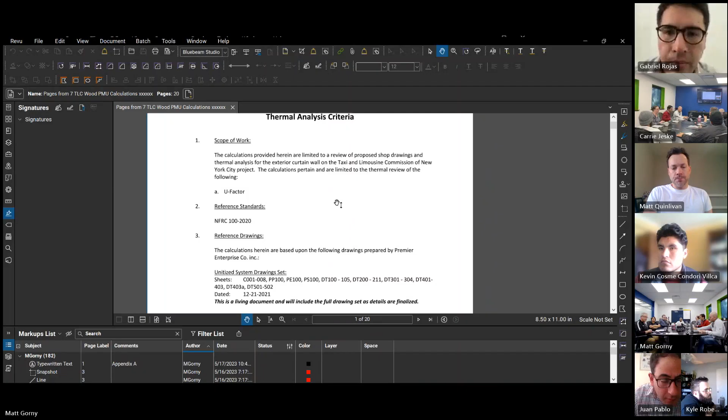We kind of jumped into reviewing thermal analysis projects. I only took a few classes of this in school, right? So everything I've really learned on this has been from getting reviewed and reviewing the codes and stuff like that. So heat is energy and it's trying to pass from a higher state to a lower state, right?

So what we're measuring in facade systems is, as we're turning on our mechanical systems, that heat is trying to get outside. And we want to measure how fast it gets outside. And we want it to get out as slow as possible. It's kind of the real zoomed out view of what's going on with thermal analysis.

One of the big things that's going on right now on the East Coast, it's being driven by code, and it's the energy code that's coming up, should be active 2024, 2025, where they're doing a heck of a lot more for following the paths. They call it bridging. So it's going to have detailed analysis of bridging that occurs in between facades and the regular structure.

So I think that's an important part of it. We're in a good spot if we can do some of this and add that on to part of our services. But that's where it's going. That's where the industry is going. Go ahead.

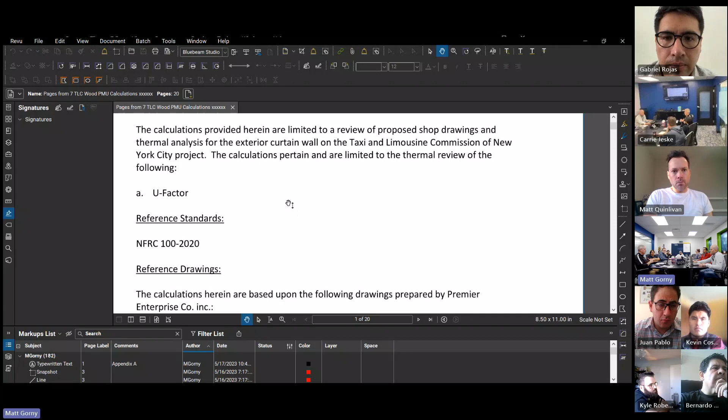So kind of with the big zoomed out, to just elaborate on what Stuart's saying there with bridging, that's kind of what we're looking for in our wall systems, because energy doesn't have a thought process, right? It just follows the path of least resistance. So if you got a wall, you got insulation here, and you got metal here, it's going to funnel to the metal. Or like on your house, it's funneling to the studs as much as possible.

And that's how it's kind of trying to get out. And so that's what we're finding. We're trying to find what is the bridge in the system. Can we fix it? Or just in general, U-factor is how fast does your heat transfer through your system? You want it to happen as slowly as possible.

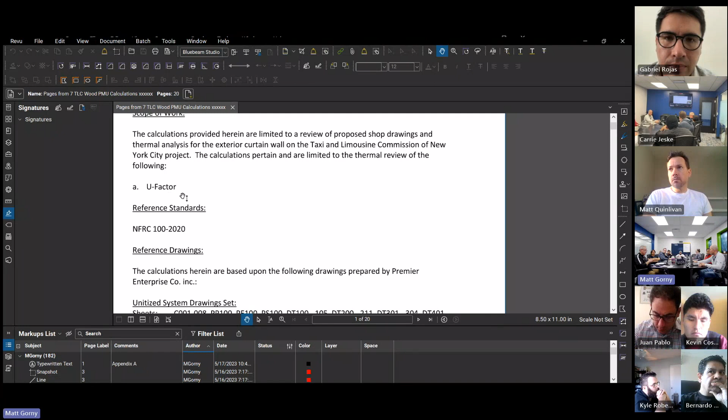So code on this is NFRC 100. There's so much I've gotten into with the consultants on that. It's a code and standard that we want to stick to, but it shouldn't be thought of as like the IBC. It's more like a reference standard. There's some stuff in there we definitely want to stick to because NFRC 100 is the governing body for like Kawneer, Tubelite, all those guys and their systems. They're going to follow NFRC 100 to a T to get their systems passed.

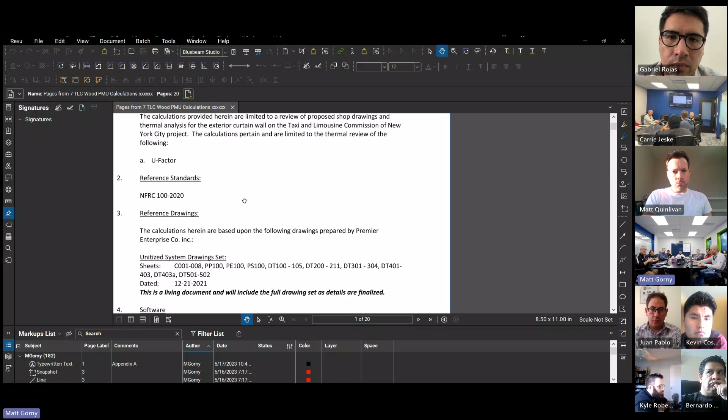And basically, there's 3 stages that they have to go through. They have to get it simulated, which is what we can do. They have to get it tested, and then they have to have a third-party person put those together and make sure they line up. And so that's kind of what the big companies do. All we can do is simulate, which is calculation.

Why would they have us do that rather than just go to a big company? I think they would like to come for the structural and thermal part. Just like a one-stop shop situation, I think. So they know they're still going to have to go test and have somebody put it together, but preliminarily we'll do the structure and the thermal.

Yeah, I mean, a lot of these are tested, right? Ultimately, whenever we've got the stick-built systems that all the manufacturers have, they've already gone through some testing. And also they've done the thermal calculations. They already have packages of those to be able to submit. Where we really get involved in it is if they have unique applications or if it's a custom type of system and nobody has done any types of calculations with it.

And so in the past, that's kind of where Gorny has actually gotten involved in it. He's been able to do some of the thermal modeling on these custom systems, and show the architect as it's passed up the chain as a submittal. Usually it's in the specification requirements that a thermal analysis needs to be done and submitted.

In a lot of cases, the thermal analysis specs that they usually call out make reference to having to model it associated with the perimeter boundaries a lot of times. Sometimes that's in there, sometimes it's not.

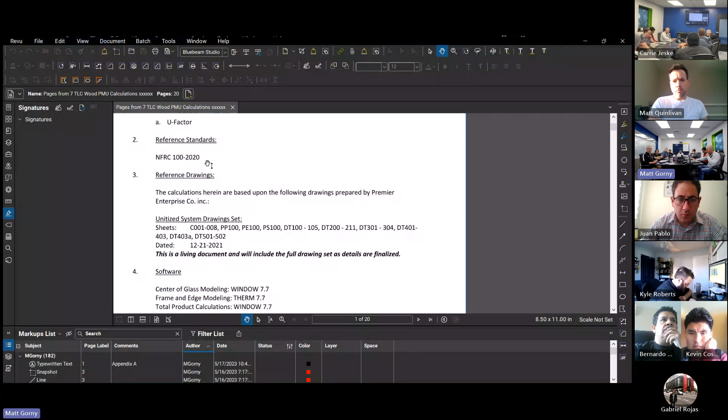But yeah, so back to what I was getting into, there's the 3 stages. There's simulation, testing, and then there's a third-party consultant that lines those together. Simulation is the only thing we can do. That's the calculation. To answer your question, Carrie, the only reason they would come to us over going to like an ATC or somebody who does that is on custom systems usually.

Yeah, just because it's very expensive to get it tested. So if you got a custom system that you're using on one job, you don't want to spend all the money to get it tested and go through the whole deal. You could just get it simulated by us and see if the architect will approve it. Custom system unitized is the sweet spot. Custom systems usually are unitized. At least when I've seen the custom systems, they're always unitized systems.

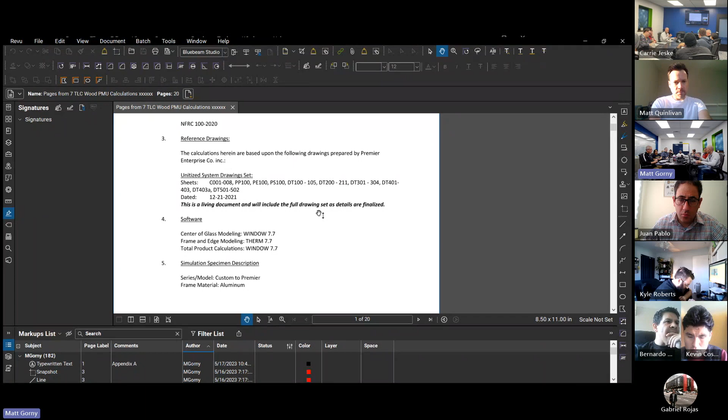Okay. They're for like the bigger buildings. At least from my experience, a taxi building is a custom system. 65 Franklin was like a custom system. So it's just stuff that's not like Kawneer, YKK, Tubelite that they're trying to sell repetitively for a bunch of different things.

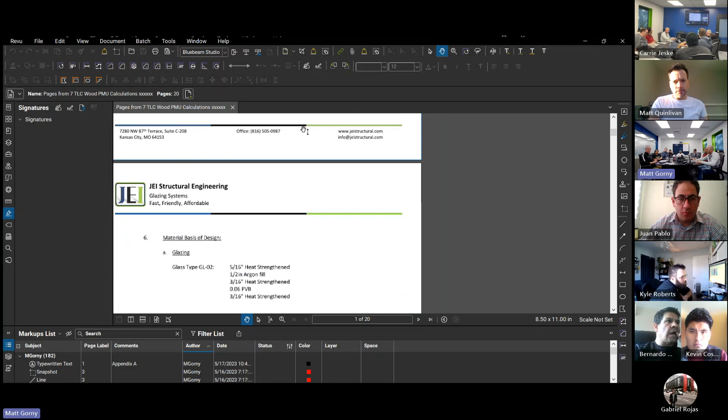Okay, so basically our software that we have is Window. It's called literally Window, and then Therm. And so Therm is going to model our parts and pieces. I'll kind of show you how I did that. And then Window is a program that combines everything together into one bay or unit. That's the glass on this one.

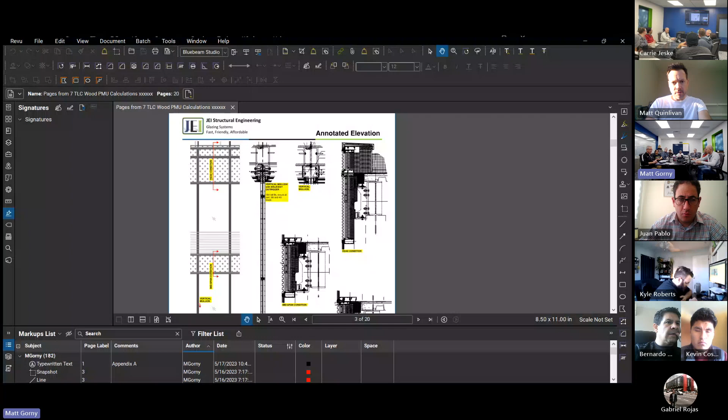So essentially, I'll keep it short. I wrote a whole document on how to use these programs in detail and a lot of the stuff we're talking about in the shared area. So I won't go into super detail because we have that available. I'll just try to do the truncated version of what we're doing. So basically, this project is a unitized project. It's repetitive, 2-story around the entire building. This is one unitized unit and this is one unitized unit.

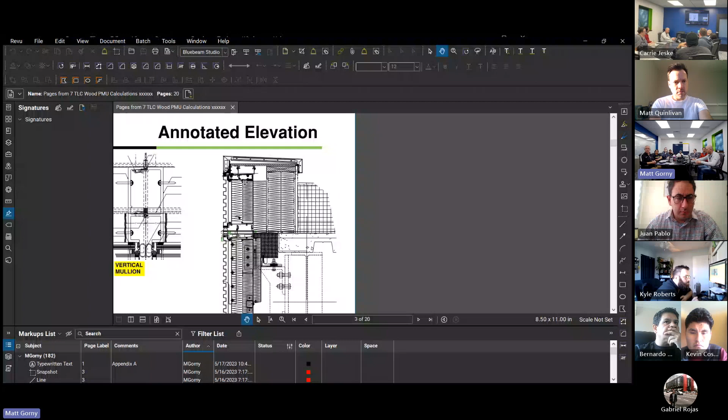They come together and basically with a thermal analysis, we're trying to find how fast the heat flows through the system. So we have to find the thermal properties for each unique part and piece. So the unique parts and pieces to this one, I heard Stuart describing, we have the top of the curtain wall with the parapet system. This is kind of a weird area where technically our curtain wall is here, but it interacts with the parapet.

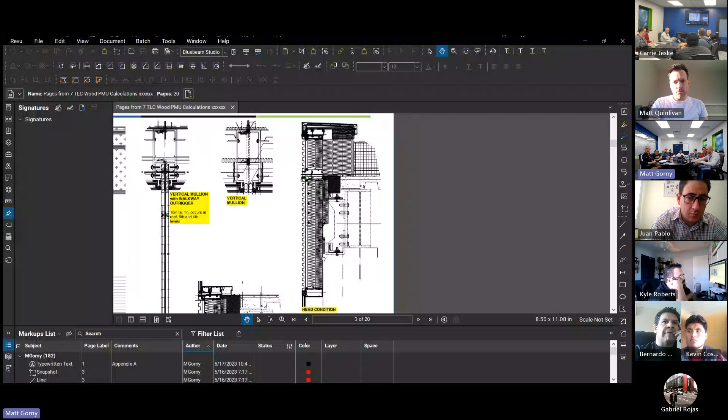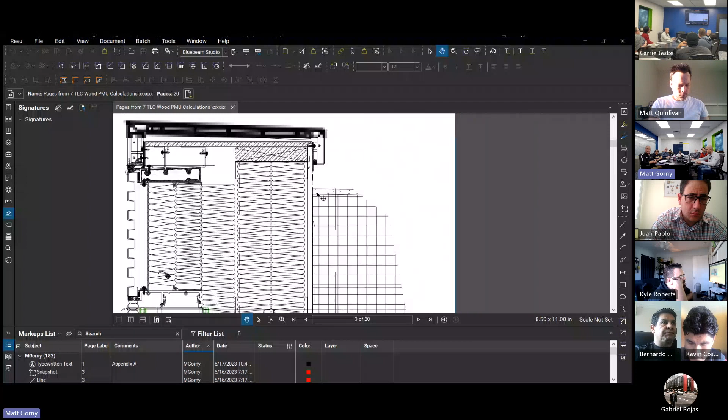How are they enclosing the back end of the parapet? So that's just light gauge framing. I don't know, this must just be EIFS or something. I'm not 100% sure exactly what this material is. What's that right behind that horizontal? That's roof insulation. No. Fire stop. Yes. So do you include stuff that's part of the parapet as part

of the U value? Yeah, for just this. Usually in normal situations, I lean towards not including surrounding materials because we've had consultants tell us not to do it. But in this case, the consultant and design team asked us to review it. So basically it's cold-formed metal studs, insulated. And I'm pretty sure I just used EIFS for that piece.

This is part of what I was talking about before. A lot of this is up to the architect—sometimes they spell it out in the specs that they want the surrounds modeled along with it, but a lot of times they don't.

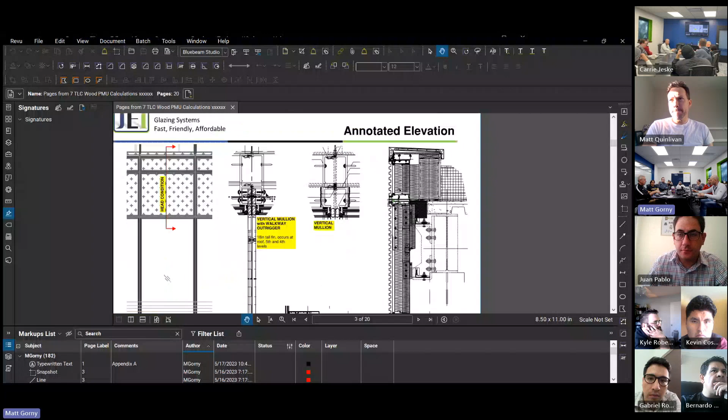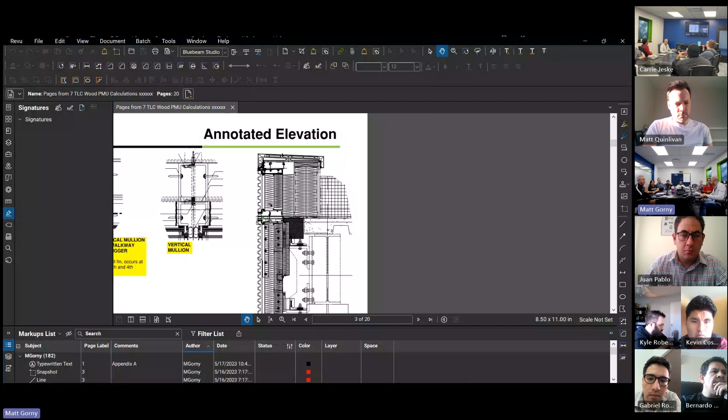It's tricky because where do you stop in some cases? I've had others where we've gotten into battles with them where they say use surrounding structure, but there's no clean line like this where you say, alright, you've got the parapet cap and roof insulation, and all this is probably good. But what's happening up here, that's a clean line, versus maybe a jamb condition where you've got wall everywhere. Where do you stop? Do you just model the whole building? No, someone needs to take over from there, a different contractor. So it gets tricky with that.

That's the head condition. This one, we have a weird midspan condition where we have a walkway—I'll get into why that's important being attached to the curtain wall. But basically you've got vision glass and then spandrel glass, so 3 different spandrel glass conditions and some vision glass conditions. And then you've got the vertical mullion condition. Typically on a typical project it would just be one vertical mullion on these unitized type projects, but on this one I also had to model where the fin was because I wanted to see what happened there.

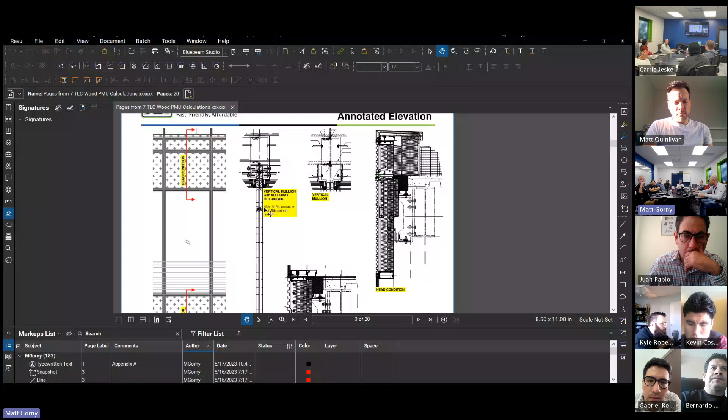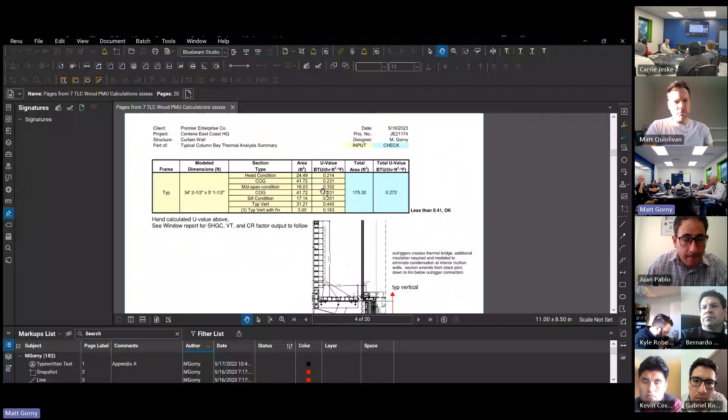So kind of getting into that. I'll go into the models here, but usually I get right to the results up front so you can find that quickly. Basically, long story short, we find the U factor for all these parts and pieces with therm, and I'll show you that. Then we do an area weighted average of how much those parts and pieces are a sum of the whole.

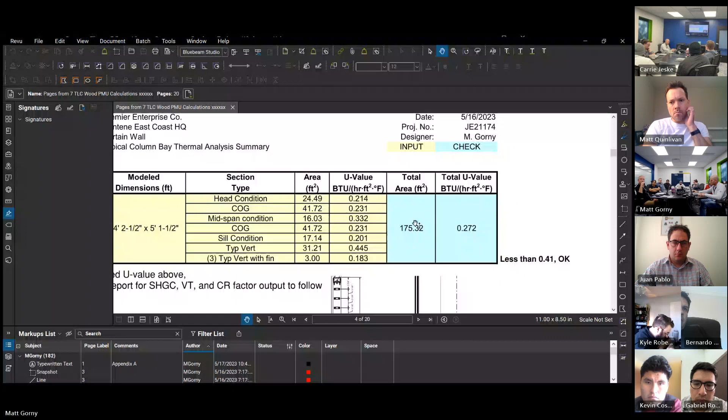So center glass, all these different unique conditions, I find the U value, I'll show you. Then you plug it into this sheet, find the areas of each. These are the U values, the sum of the total area, and that gives you your area weighted U value of the assembly. It's like looking at something simpler, like taking your wall at home—you've got studs, you've got insulation. Has anybody taken heat transfer thermal in school? Yeah, so it's like a parallel path, and you take the inverse sum, and that's how you find the overall U value of your wall. That's essentially what we're doing in a bit more of a complicated assembly.

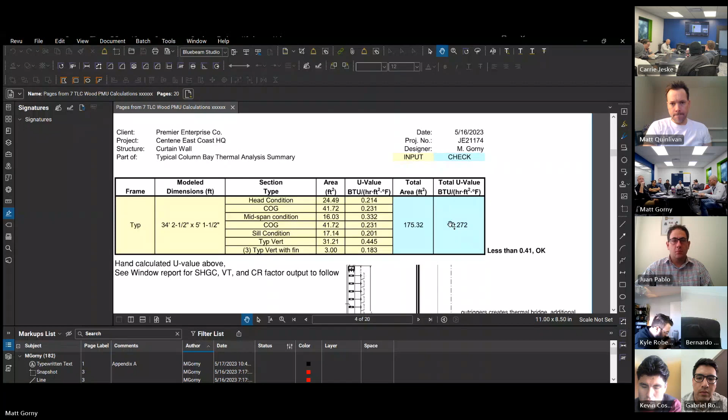So this is therm output. You recognize that's my head condition with all the insulation. This consultant was a stickler about making sure we reported all our information, so I think it looks better that way—I started doing this. This is all the materials we used and their thermal conductivity, how fast each material allows heat to transfer through it. The program does the math of figuring out the assembly's factor, and this is the heat map it produces. So that's your overall U factor spit out essentially here.

This is out of therm? It's out of therm, yep.

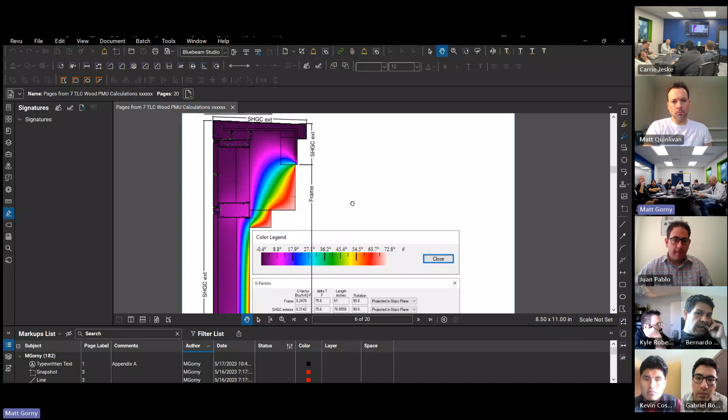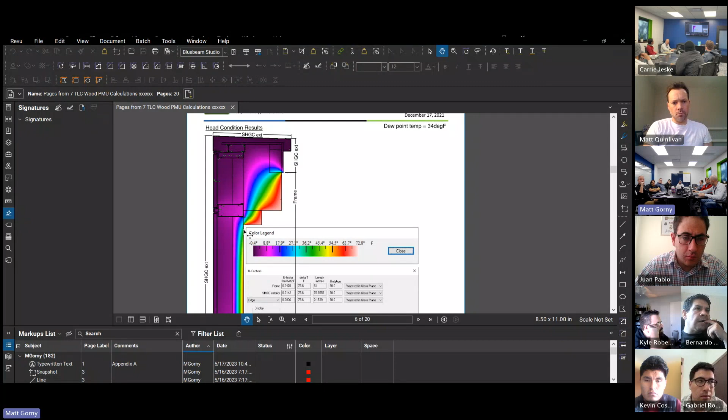What's important here with the heat map it's spitting out—the main thing therm does is find your U factor, but the other thing it does is this heat map, and that's important for condensation resistance. Condensation is like having a cold cup in the room: if the outside temperature of that material is below the dew point temperature of the room, it'll condensate. So we need to find out if heat passes through quick enough that it allows the internal materials to get low enough to drop below our dew point temperature for the room. If that happens, you get frost and condensation on the inside of your metal. That's another thing we're looking for.

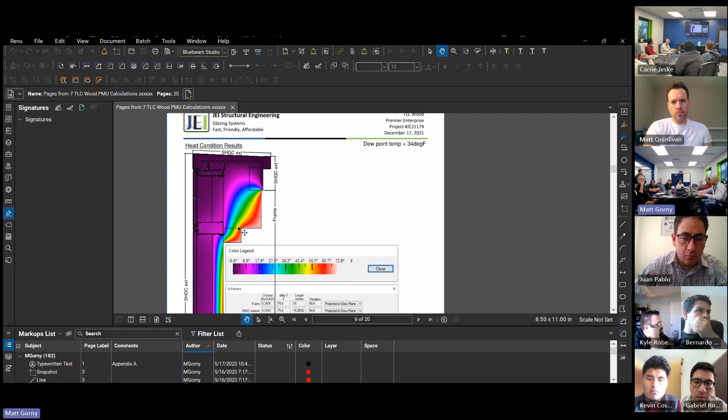You can kind of draw—really hard to draw with Bluebeam. I don't get why the program doesn't let you just plug in a dew point temperature, but basically you need to look at your heat map and see, okay, 34 degrees is roughly when it starts to get dark blue.

You can go through here and draw, I forget what that line's called, but there's a line that says nothing inside really gets to blue. So we're okay, we don't have condensation issues.

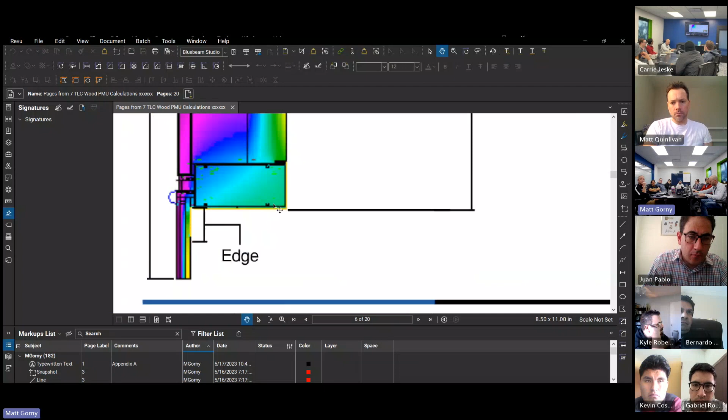What about on the horizontal below? That big blue area, it starts to get to where it gets blue on the inside, but the good thing about THERM is you can put little thermometers in to check. I can't tell the color just eyeballing it, so what's the actual temperature here? All this was right at or above the dew point temperature, so still okay.

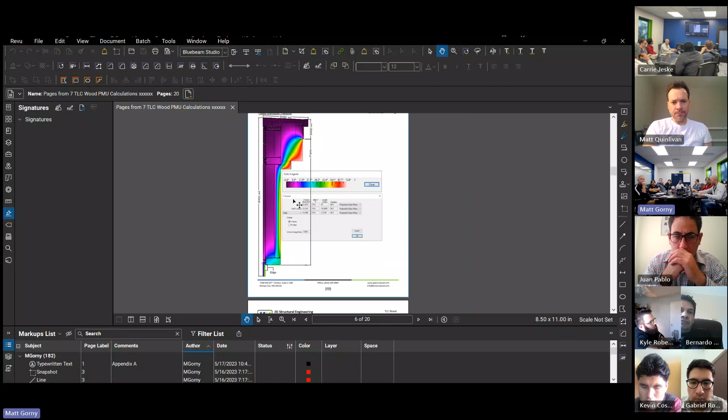One other important item, more of a details item, is that you have to label all of your boundary conditions in THERM. All that really does is tell you what's included.

Like I said, when we're doing our area weighted average of the entire assembly with that spreadsheet, this is also doing an area weighted average of what you tell it the boundary conditions are. So solar heat gain coefficient exterior, visible light transmittance - don't ask me exactly what those are, I let the program handle that ultimately.

Basically I need that for the window later because it needs to know how much of this frame is on the outside of the building. So I set all of this, the top is on the outside, and then the back.

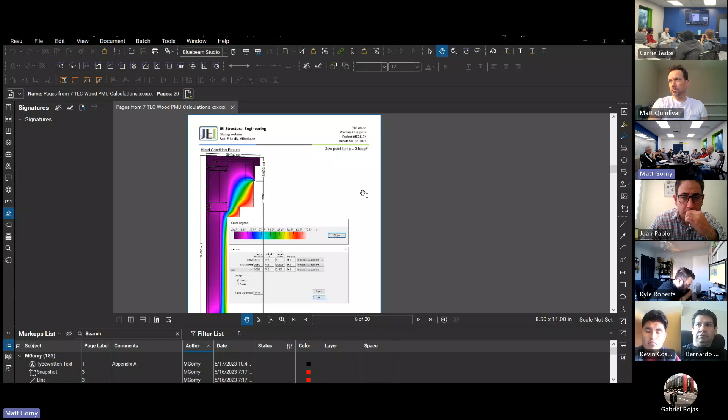We already have like an SHGC value, like a thermal analysis - now incorporate that there, will it give you the same? How does it pan out when you already have an SHGC value for your glass alone, and then you put it in?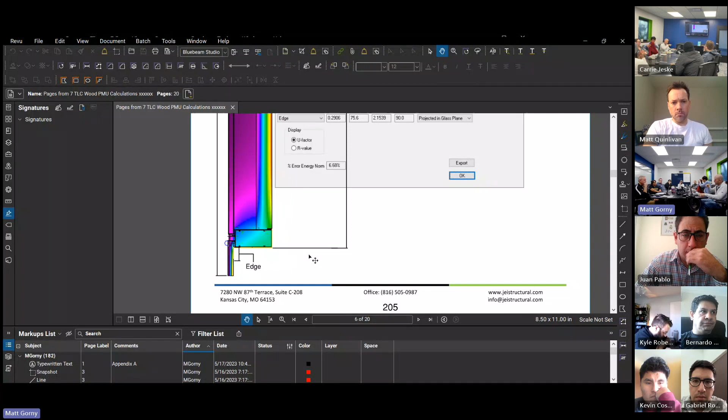That's a good question, I forgot to explain that. There's some back and forth between WINDOW and THERM. You have to start off in WINDOW and plug in your glass, which gives you the solar heat gain coefficient of glass, visible light transmittance, and U-factor of your glass. You take that, save it, and backwards import it into THERM, so this piece of glass in THERM is the actual project glass.

Yeah, so that's a good question - will that typically line up with an insulated glass manufacturer and their data for the glass? It's pretty spot on.

Every year, before you do any project, there's an insulated glass database, IGDB or something. You have to have that as a program as well, and you update it, and that goes immediately into WINDOW - it draws from that database. It has like thousands of entries.

Every manufacturer has an exact piece of glass, so you have to go through - sometimes it doesn't have the exact match because there's a custom layup or something, but you have to go through and piece all the different pieces together, like Cardinal Glass for example.

Let's say I've got a 3-light layup, a 3-light IGU. Cardinal Glass will have a piece of fully tempered quarter-inch glass - you put that in there, then you put your airspace, and you can piece those assemblies together. On top of that, there's going to be some sort of film on it - Cardinal Glass or Pilkington, they all have a certain type of film.

That's the trickier one where you want the right manufacturer, because there's some proprietary stuff going on where you'll get little differences between Cardinal and Pilkington. So you've got to piece your IGU together that way - insulated glass database into WINDOW, then pull that out of WINDOW and put it into THERM.

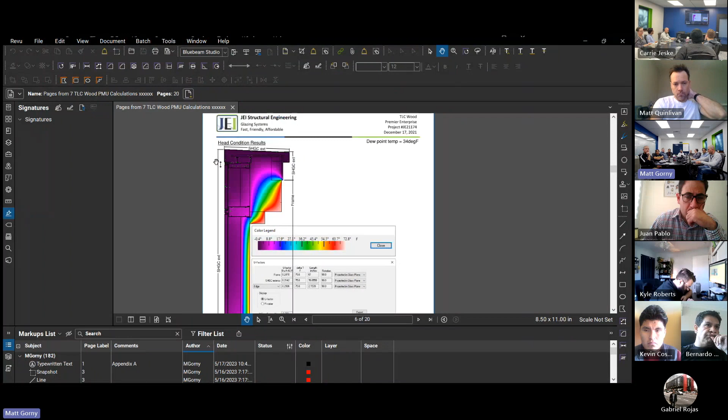This is frame, basically from horizontal up, because even though this is a spandrel area with metal panel, it's going to act similar—it's aluminum framing essentially.

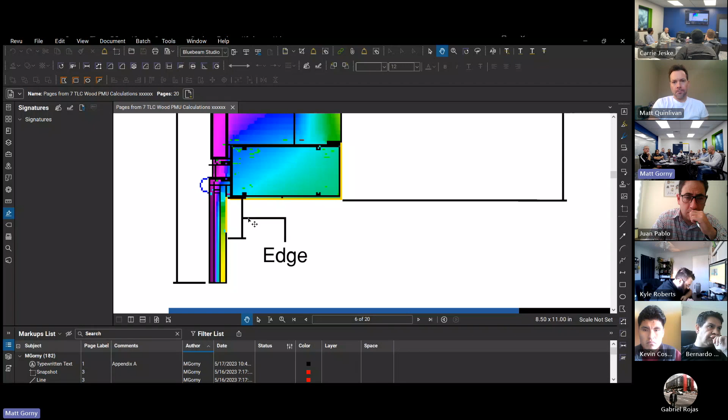This is the edge, because edge has some unique stuff going on, edge of glass, because you have a spacer. So you have to basically tell it, hey, I've got either a stainless steel spacer or a warm edge spacer, and that interacts with your frame a little bit differently.

And so when the program runs it, it'll give you U factors for each of those things in case they're important. The main one I use is the solar heat gain coefficient exterior, for when I'm using my overall system area weighted averaging, because that's for the entire assembly.

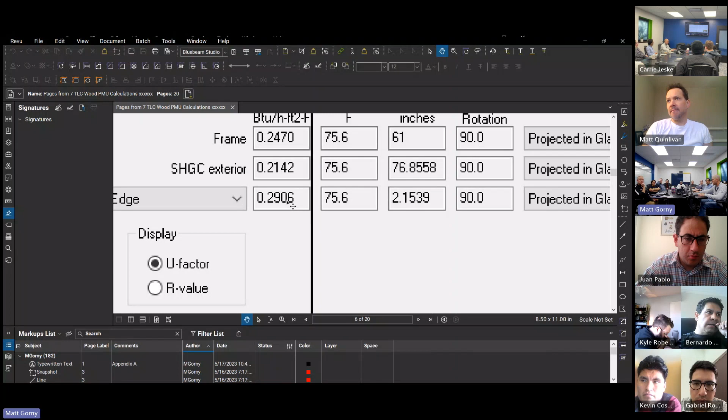If it becomes important and you're so close that you need to figure out whether a warm edge spacer would be better than a stainless steel spacer because your overall U factor is goofy, I can go look at that and say, okay, if I use stainless, it's at 0.29. What happens if it's a warm edge spacer instead? Does it change? And then what does it do to the overall U? So that's kind of why you break that out.

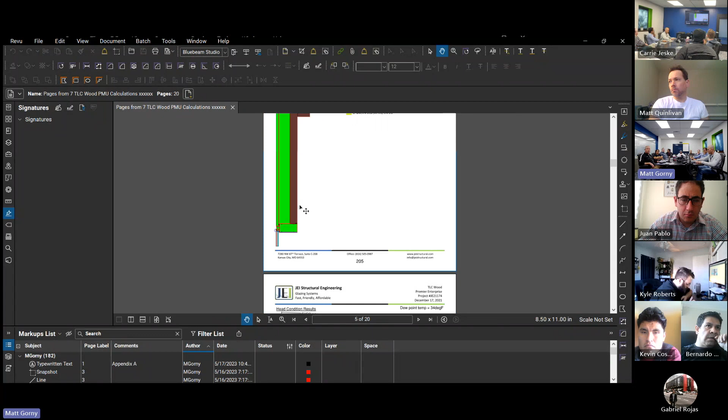Does it only have two different options, a warm edge spacer and stainless steel, or are there more? You can do whatever you want—yeah, in THERM you can do anything. You can identify a proprietary spacer, type of user values, or whatever.

Yeah, you can import materials, because ultimately when it imports this glass from WINDOW, it asks you whether you want to import a spacer automatically or draw it in. A lot of times I just draw it in, and this one I had to, because when you import it automatically it usually assumes it's stainless and you have to go play with it. So I just drew it in.

Does it allow you to put information regarding the gasket, since the gasket separating the glass and the aluminum is just like a rubber gasket most of the time? Yeah, that's the purple here basically—the other purple too, the exterior and the interior. You have to basically define and draw every single piece of this thing.

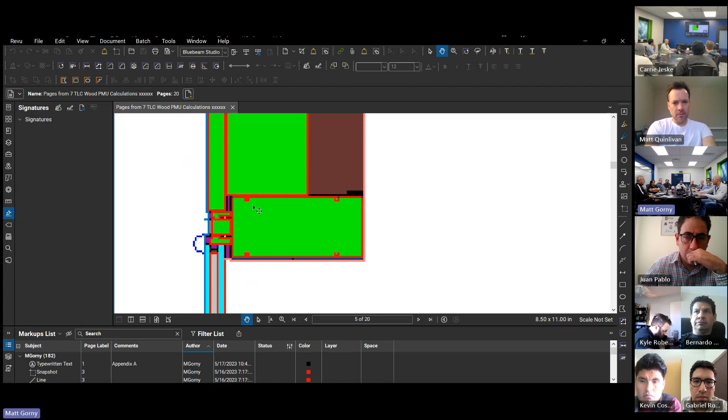So without getting too much into that, it's not as much like Shape Builder where you just import a deal and it does it. Sometimes that works, but a lot of times you have to draw all these little rectangles, like nodes, and kind of do a polyline deal to define the properties—the permanent properties of that element. They have a bunch built in, but you can make new ones and define their thermal conductivity.

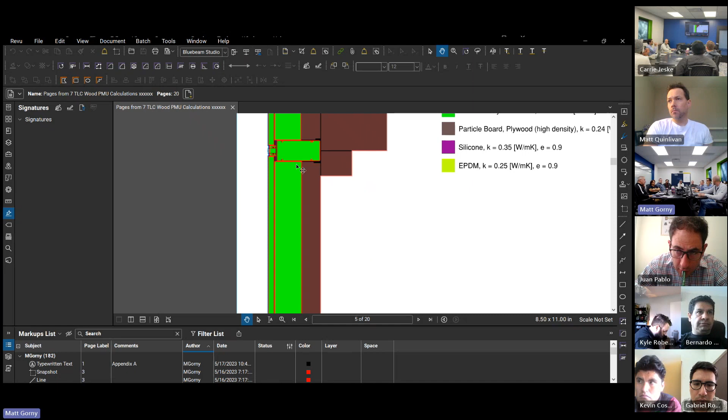And from the little that I know about thermal—because I know like maybe 5% of what you know—my understanding is center of glass is the best thermal part of the whole frame. Edge of glass is where we lose all the heat, or where the cold gets in, or the cold comes out. That's the thermal bridge, right.

Yeah, so I don't know hardly anything either. He's really the guy—he knows all this stuff.

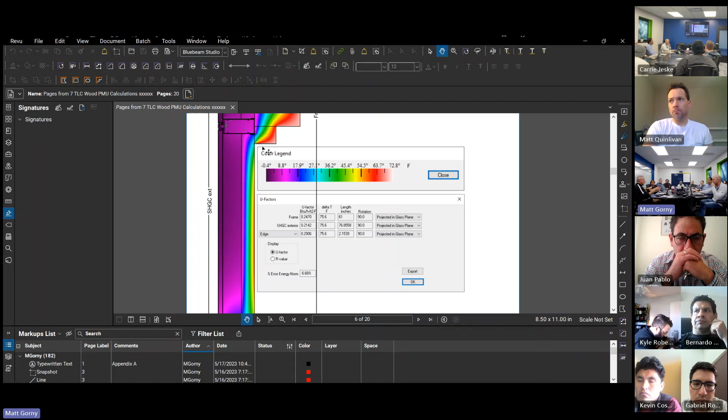I do have an important note that I just wanted to stop on because we're talking a little bit about spacers. In the past, whenever there have been failures of systems, many times it ends up being an issue with a custom spacer and how that's operating. So I just want to let you know for the future, these custom systems—be very careful about the spacer associated with it, because that can lead into some tremendous lawsuits.

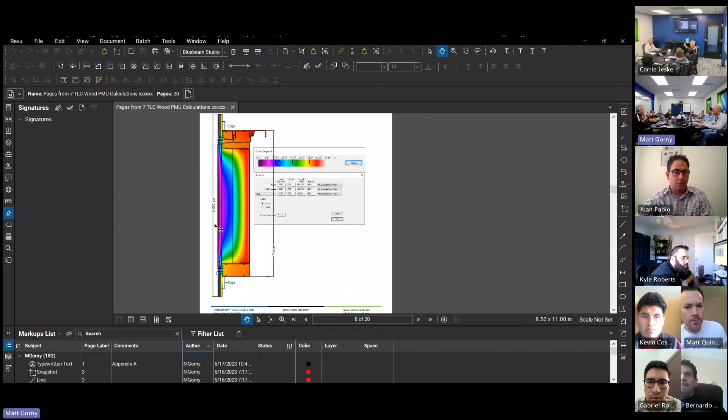What is it—is it too stiff, does it tear? All I'm saying is it seems like it's always coming down to the use of a new proprietary spacer or something, and ultimately that has a huge impact associated with it. Because if you can imagine, the THERM analysis relies heavily on that edge condition. And if it doesn't end up exactly right with all of the environment that goes on the outside of the building, that edge can end up condensing.

And then all of a sudden, then you got problems with people complaining about condensation on their windows and all the other stuff that's going on. So it's a big deal. So it's not necessarily a structural concern, but sometimes it could be, I guess. But I'm just saying, if we get into this, this is where a lot of the problems arise from.

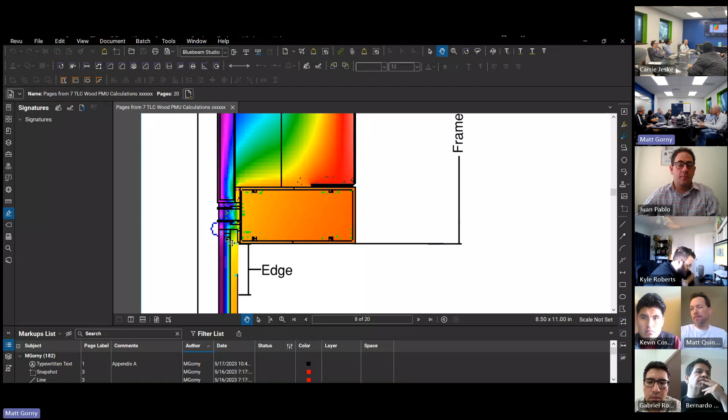So center glass definitely does the best. And the reason why thermally the spacer is really important is because the reason the center glass is your best U value is because it's vacuum sealed. And so the program, at least that's my understanding, is accounting for the vacuum seal. Because I had this conversation with a client on this project. He wanted to replace the cold form of the whole project.

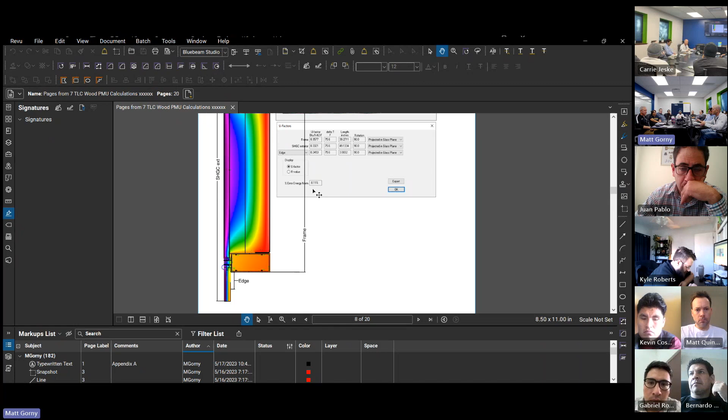And so the architect was having trouble getting a U factor to work out on a little curb that was an insulated curb with cold form metal studs, and it had a Centria panel on the outside. I said, oh, let's just replace that with curtain wall. We could just infill the curtain wall with the Centria panels, but we'd replace all their stud work with curtain wall. He's like, that'll be better because you said my U factor for the curtain wall was 0.2 whatever. I said, no, that's because a big chunk of it is glass.

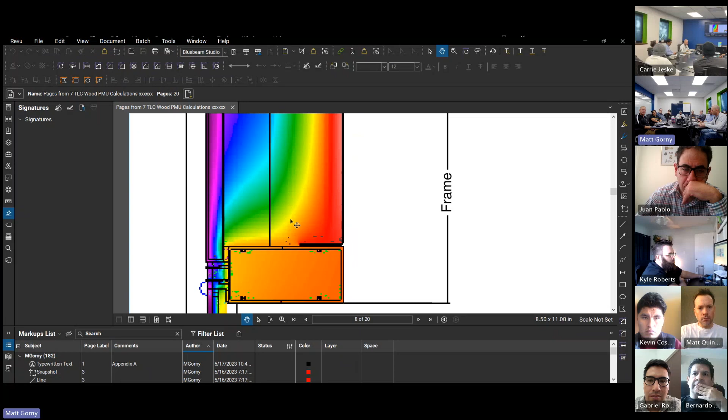And so you can see on here, this is the glass, and you see my line, we're all orange and green. This is metal paneling, it immediately starts shifting back into your insulation. This is all insulated. You can see your line dumps back way further. And the reason why, from what I've read, is the vacuum seal that helps you with your DLO. And so that's what I explained. I was like, it is only if you completely replace this with glass too.

And argon or vacuum seal has no impact? If they add argon to the... Argon's a little bit better. Is it? I guess it still is sealed in some way. So it's a good point, because it's not exactly a vacuum if they're filling it with argon, but it's sealed off. So whenever we call it an airspace, it's actually often a vacuum inside the glass. Well, and I guess that's why there's a load share. Would that be because there's a load share? Or maybe I'm using the wrong term. It's sealed off to the environment, but there's a vacuum, so we can assume that it's going to pull the other piece of glass, right?

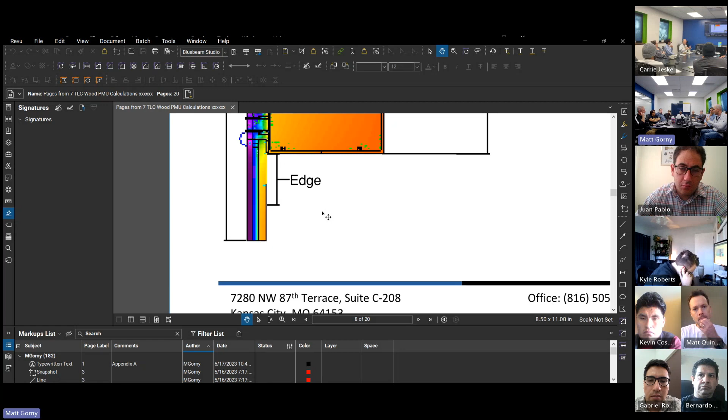Yeah. I mean, ultimately, that's what that seal is around the edge. They'll vacuum that out through some ports that they have identified in the edge seal. And then either that or fill with argon through those same ports. And they're supposed to put plugs. And those plugs are an issue too, in being able to get that.

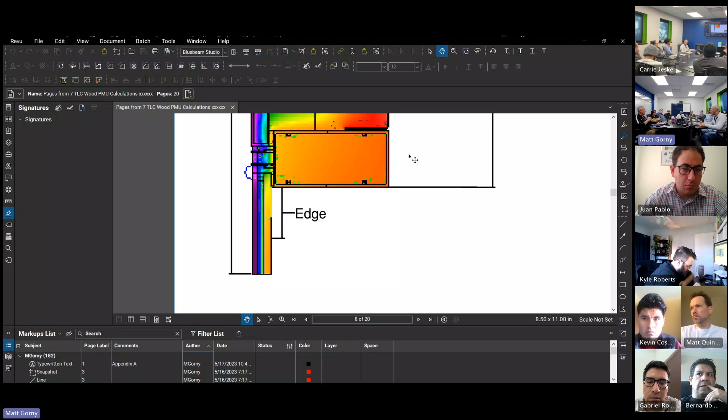The main reason for the argon is what, thermal? It doesn't conduct the same, and so it adds to the thermal value. That's the main purpose of why people use argon. And from what I understand, it's not all that much. It's not a big deal. And the argon has a way of leaking out over time. Supposedly, it's shown that argon will essentially be almost gone over 10 years. Is it harmful to humans? Not in the amounts that are inside of it.

Question regarding that airspace. In order to improve the thermal capacity of the glass, they have been increasing from 1/2 inch. Some people will go to 3/4 inch to 1 inch just to increase the thermal capacity. Will it help on this?

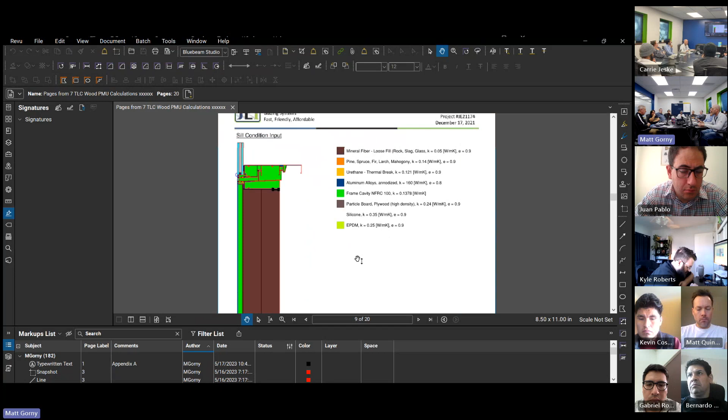Yeah, I had that conversation with one of our other clients. They had a 3-light IGU. Just from running things, I was learning too. I ran it with everything in there, and then I ran it with the middle light completely excluded and just the bigger airspace. They had a 2 1/2 inch airspace and a 1/8 inch ply in between that, or 2 1/4 inch plies outside. So 1/4 inch ply, 1/2 inch airspace, 1/8 inch ply, 1/2 inch airspace, 1/4 inch ply.

I ran it with and without that center 1/8 inch ply, and you get roughly the same U factor. So it's really the separation, the airspace distance. So the extra piece of glass didn't do anything, but it helped a little bit when they had me look at it with a film on it. Okay, that changed things. Does laminate help any? A little bit, just because it's a little thicker, but no, it's usually the airspace of the glass that matters the most, and then a film.

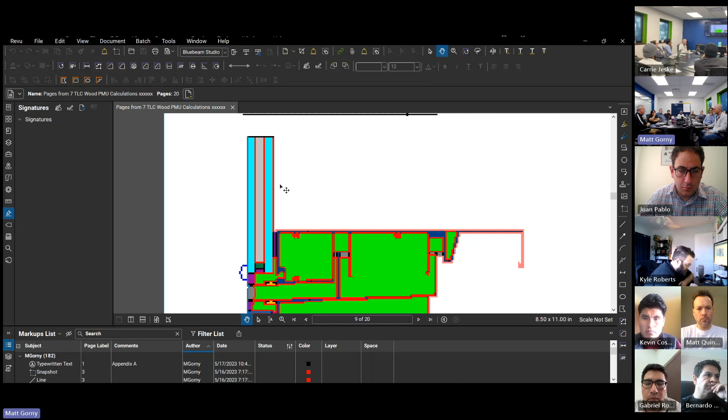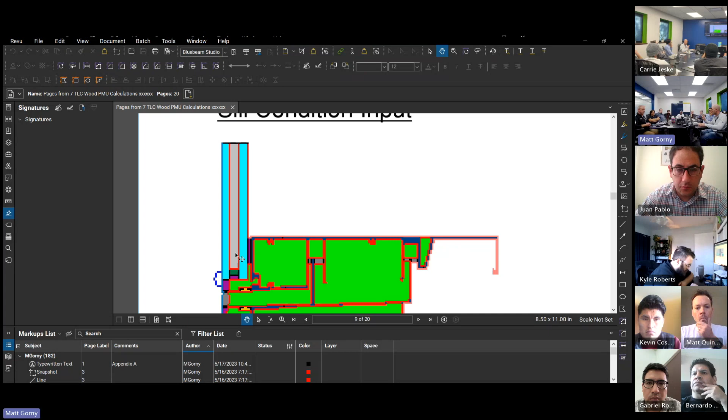If there's like a low-E coating, that kind of changes things. Well, for the lower heat gain, low-E. Yeah. So what I've seen is mostly it's the gap, the actual distance. But structurally too, you want to have the 3 when you get out that deep, because you can't really have that big of a seal without another piece of glass in there. That spacer is a flimsy little thin, like 0.006 something metal. So if it's spanning 1 inch, it doesn't take much. You could probably crush that IGU with your fingers.

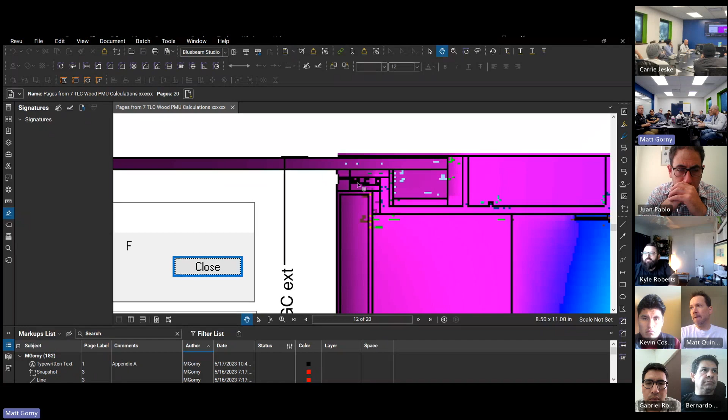Yeah. So basically, it's really repetitive after that. You go through each assembly piece and you find the U factor, and I pull those U factors up to that spreadsheet and find their participation. On this one, the big deal was the walkway. We had a walkway that essentially passes by the thermal break. So this is a huge thermal bridge because you got your thermal break of your system, but structurally it's a heavy duty walkway. So we had to attach back into the meat of the curtain wall system to get it to work out. And so you're past your thermal break. So it bridged like crazy.

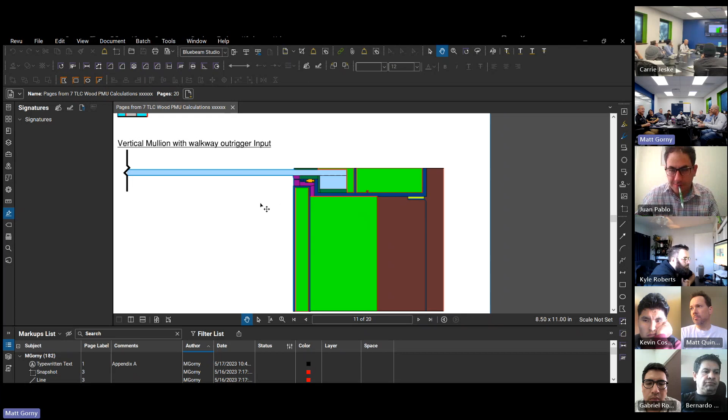And we're still in battles about the condensation resistance of this because I said it condensates. The consultant just changed the exterior environment from 0 degrees to 14 degrees. And so the client's not comfortable with that. Wait. There's a walkway being supported by a horizontal mullion? It's the vertical. There's a good detail of it. So this is the vertical mullion. The walkway dives into my unitized vertical, and then we have a bolted assembly to attach it back into the meat of the curtain wall here.

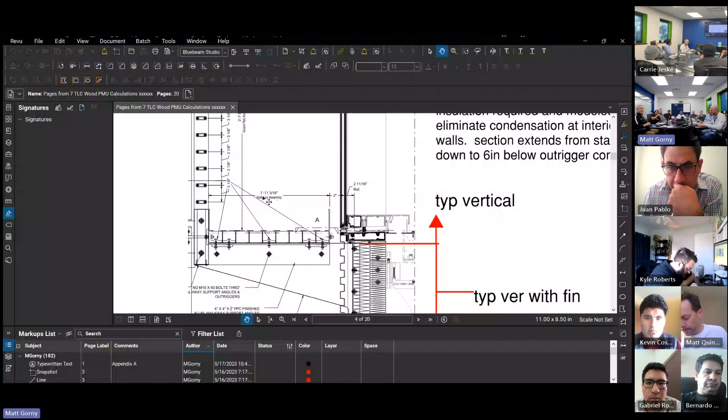Walkway, like people walking? Yeah, big questions around. It's like open, and you just said walkway, and it was like, hold on a second, what? That's a whole nother lesson. Once I finish this, I can do it. It's been going on for what, 2.5 years now. We're fighting with the consultants. I don't think the walkway is long enough. The cantilevers, how long is this one, 1 foot? Yeah, but there's another one on the other side that is out. You be quiet. Don't say that out loud, they're gonna wanna expand.

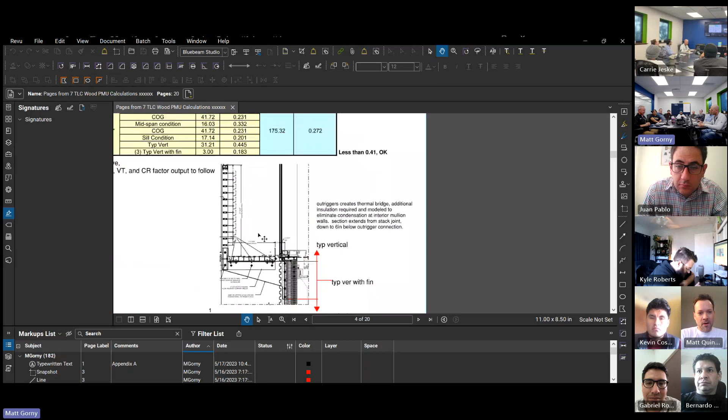So actually supporting live load from people. Yeah, that's the big question, because we're all structural engineers, you guys are curious. One side is small, like Ivy said. The other side is 4 feet wide. And there's a balcony on one side of the walkway and a balcony on the other side. This is meant to be for maintenance personnel. But the architect kind of tried to shove in a dual use without really getting it code approved through the building commission: we want people to be able to pass from this balcony to this other balcony.

And so the architect and design team want us to design for live loads, like full on 100 PSF balcony loading. With an aluminum mullion. Yeah. 100 PSF live load on there, that's what they wanted. I said, that's crazy. You can't support 100 PSF from a curtain wall.

So we got them to back down to 40 PSF live load, which is elevated platforms. And so, yeah, it's been a whole fight, but we're still fighting it. So that's the first.

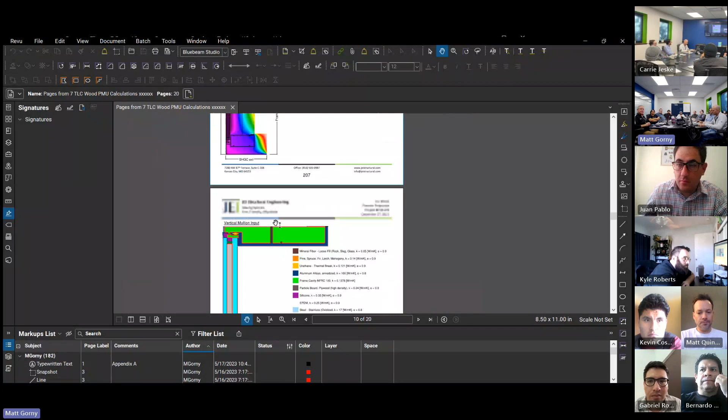Yeah. So thermally, that created a lot of condensation back here when I used 0 degrees outside, because obviously we've got a big thermal bridge at that location. And so it's not a great solution, but it was the only thing, again, being a structural engineer diving into thermal: we put an extra insulated sealed-off backpan.

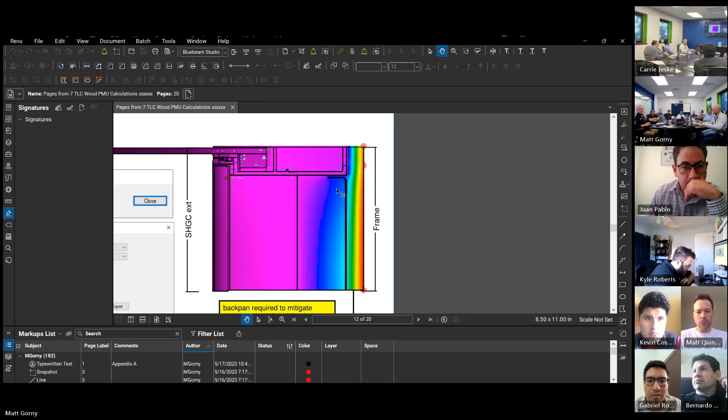So there's still some questions from the consultant about how that comes together on a unitized system and gets sealed off. We've got to figure it out because there's no other way to not get it to condensate. We went through a little bit of an extra detail on this project because of that issue. I won't go too much into this, but long story short, we took all the different parts and pieces to do area weighted averaging of the whole assembly.

And we went to a company who does 3D analysis. And ultimately, all they did was take this one shot where we said there's a condensation problem, and they found the same stuff I did with THERM, pieced all those together just for this part, and then they used a fancy rendering program to kind of mock them all together.

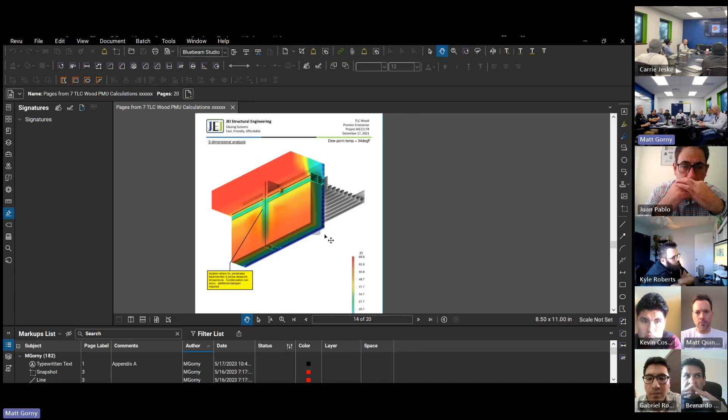Yeah. So that one right there. Okay, that's the walkway. It's getting below the dew point at the back of the members. Yeah, exactly. So this is all below dew point temperature. So you would have some condensation on that face of the aluminum, in the form of little droplets forming inside, possibly.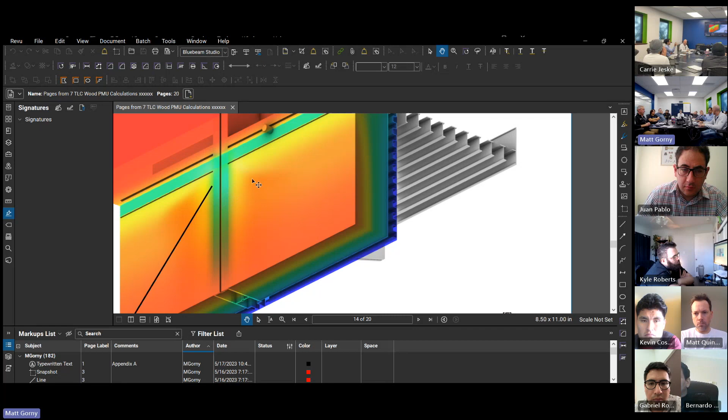THERM, and I could be wrong, like I said with the NFRC stuff, it's not like the IBC, where it's like, this is the law, right? This could redistribute. It could see dry air or something. I don't know. It might not condensate, but the program says it does. So I don't have any way to say that it won't either.

I also looked at it, because the consultant said, hey, use 14 degrees outside. Well, I was like, let me find some evidence, because learning from Stuart, let me find evidence that we can't do that. I looked at data from New York City for the past, I think it went back 50 years, and it didn't get below 14. Really? Yeah.

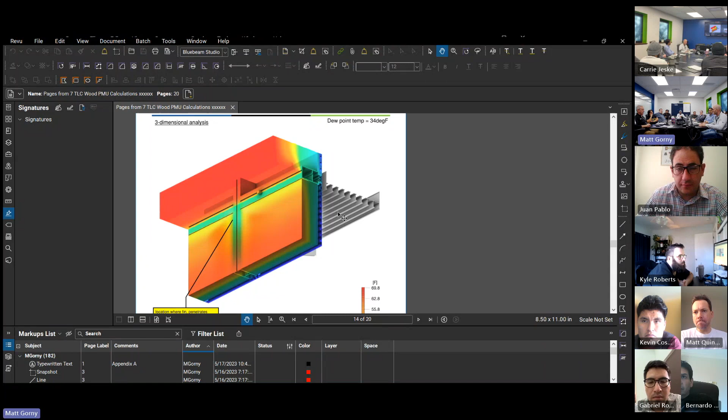In Manhattan, like for the urban heat island effect? I was surprised, because it's supposed to be cold there. I was like, this will be easy. But no, I looked back at historical data and it never got below like 15, 16, 20 degrees as the coldest. If the urban setting has an impact, I don't know. Or I didn't find it right, because it's not easy to find.

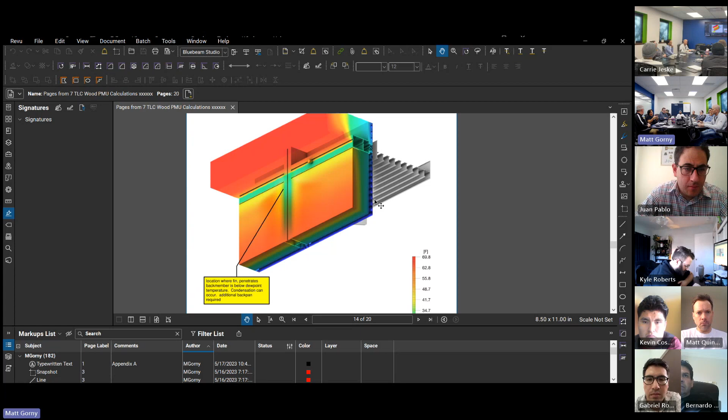What if, because we're receiving some clients, some are good, some are bad. The one that you model in THERM is really important, because detailing is very important on this, especially when you do this 3D. It should be almost perfect to what we're installing. So in 2D, let's say we got shop drawings that are not that good, how do we model it in THERM? It's a good question.

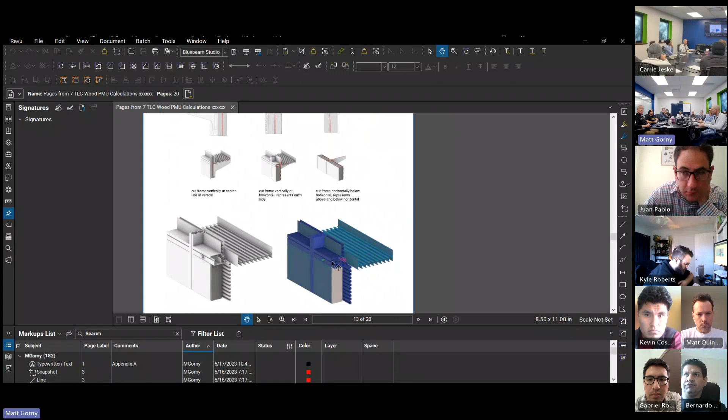Most projects that I've seen, even if the shop drawings aren't great, you can get the AutoCAD files for all the parts and pieces and kind of mold them together and still do this. To your question, the extra detail of the 3D analysis only occurred because I told the consultant he was wrong. And I didn't say you're wrong, right? I said, hey, this condensates. I think we should do something about it. And the client jumped on board with it and said, yeah, we should do something.

I don't want to take that responsibility. And it turned into a big deal. Normally, from my experience, small experience, like I said, 4 or 5 jobs, this has not been required. And to help with that, Integro, they're one that we did a 3D analysis with, and they're a Canadian company that has in-house thermal engineers. And so they kind of helped hold my hand through one of them.

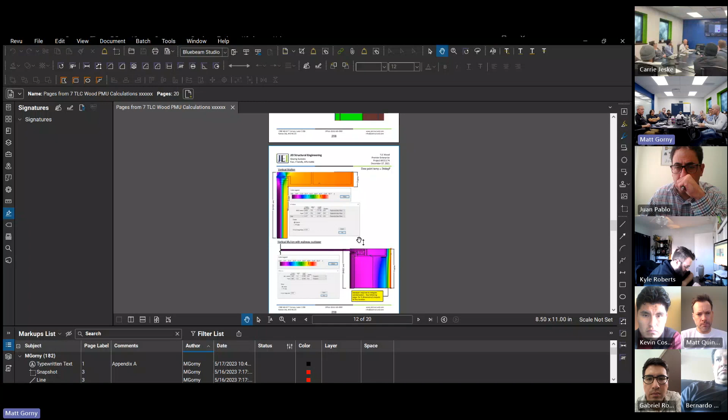And it was not any of this. It was literally just this stuff and then the spreadsheet. And they said that's all that they see required on most jobs, just to kind of look at the overall deal. Most of the time you can still get your parts and pieces and get it. This level of detail, like I said, I've never seen it be required yet, except for because of this.

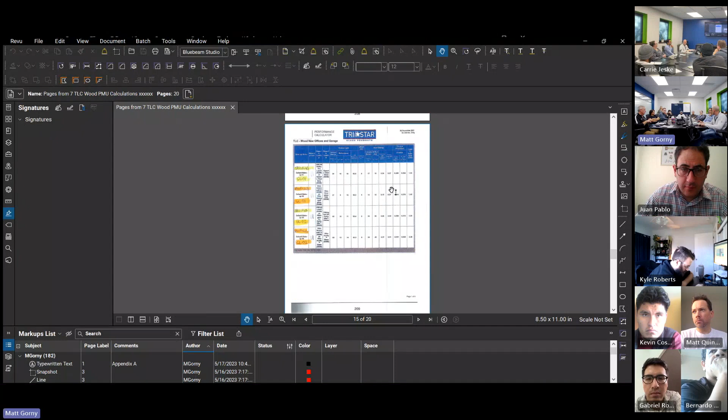And maybe, I don't know if this is a generalization, but the quality of a shop drawing typically is representative of the size of the project. Yeah. Because if you're going to do a multi-story unitized system, I can't imagine a very poor set of shop drawings that just use manufacturer parts and throw it together with no letterhead. Typically the bigger projects that might require the thermal analysis will have very detailed shop drawings. Yeah, custom end of things. Typically get pretty detailed.

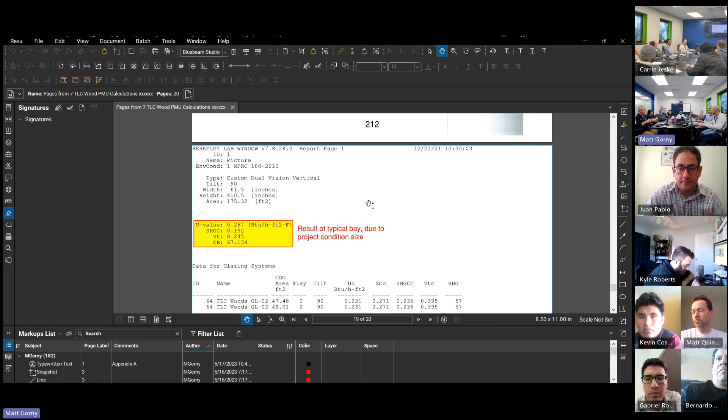Whereas some of the projects that we see, the 5, 6 frames, some of those shop drawings are put together with the information that's available on Kawneer or Oldcastle, and they just throw in whatever letterhead on it. Are there any comments or questions from anybody online?

That's really good, man. I hope to get one of these projects soon.

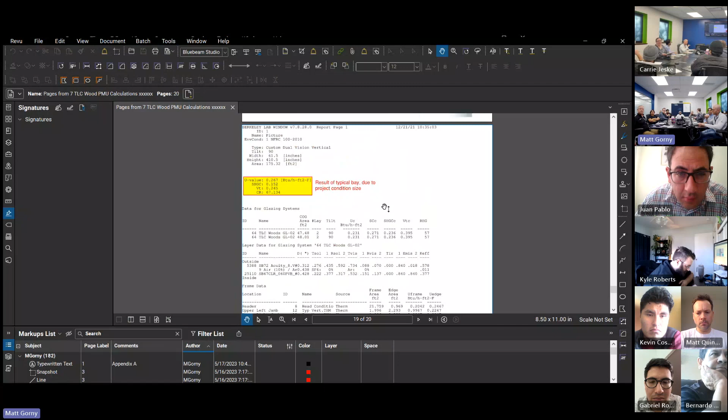Last thing we have to do with the thermal project is we take all the parts and pieces from Therm and we import it into a program called Window. And that one's really easy to do. You say jamb, vertical, center glass, blah, blah, and it basically takes what you plug in and gives you an overall U factor for your assembly as well. So it's kind of like a second guess of your overall U factor. It gives the solar heat gain coefficient and visible light transmittance, the stuff that I don't really know 100%.

And then this one is the interesting one that I relayed to the consultant as well. This number is a condensation resistance factor number. So Therm kind of looks at those lines of flux and magically puts some number to it. Even when you read it, it's like an idea. It should be close to 100. The fact that it's at 67 is the program saying this is probably going to condensate. When I ran other stuff, it's like 99, 100. So it's like a confidence in how it won't condensate.

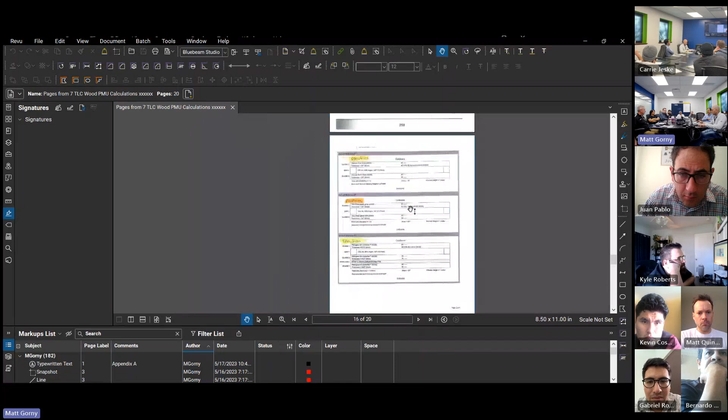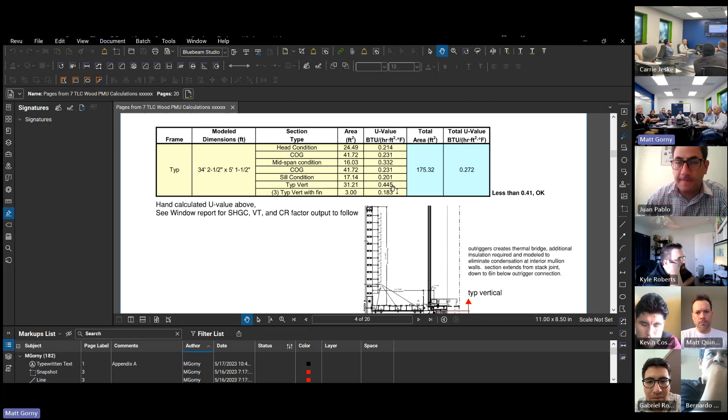I know that we need to wrap it up, but just as one of the takeaways from your lesson, higher R values means better insulation. Lower R values means that your temperature fluctuates easily and travels from inside to outside. So the maximum is 100, that's for the condensation resistance factor. Yeah, the maximum will be 100, that'll say it won't condensate. But for the R value, it's more like 1, 2, 3, 4. It's not a percentage, the R values, right?

Yeah, it's BTUs per hour, per area times change of the temperature. So for the R value, it'd be the inverse of that, right? It'd be the hour, feet squared, temperature change over BTU. Yeah, it's just inverse of U value. I always think of it as U value from school. R value is more like what Home Depot and them will put in their stuff.

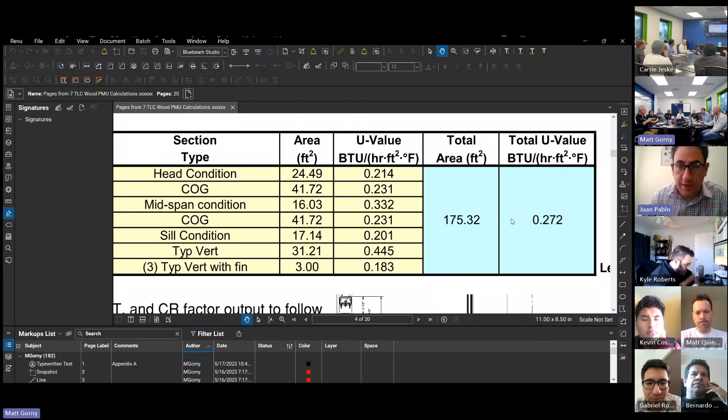Good job. Thank you. Yeah, cool. You switch to the whole screen. Really good. Nice job. Yeah, great job. Yeah.